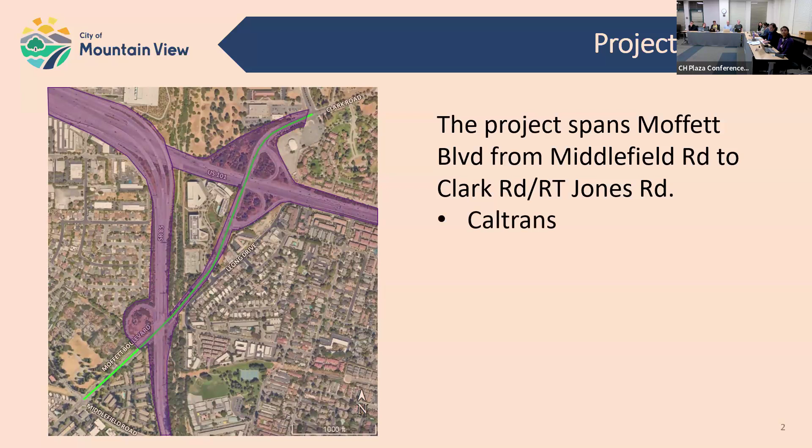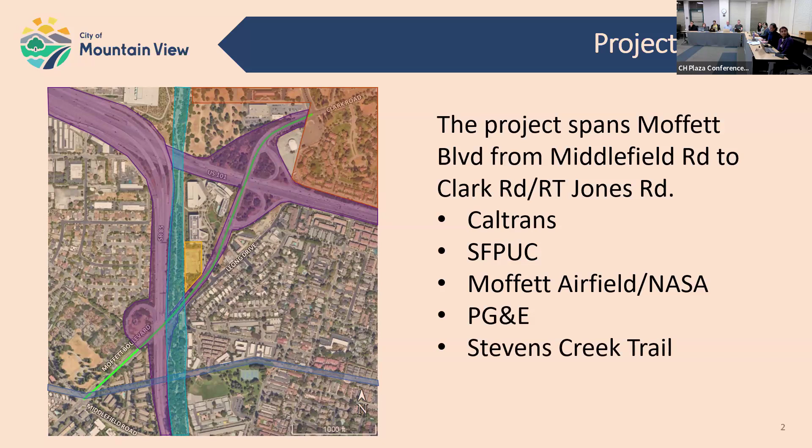Also, a little bit of project background to look at the timeline this project has taken so far.

In 2015, the city contracted with BKF engineers to conduct a bikeway feasibility study for the corridor as part of a planning item. In June 2022, a virtual community meeting was held to gather input on bikeway alternatives, and BPAC was also presented the Complete Streets checklist for the OBAG 3 grant application for review and comments.

At the start of 2023, the city was awarded $3.5 million through the OBAG 3 grant. To secure this grant, council adopted a resolution providing local support, committing matching funds, and stating assurance to complete the project. This past June, City Council authorized a professional services agreement with BKF for design services and to provide construction support, and the design was kicked off this past fall.

This project is federally funded with the One Bay Area grant funds. The scope of the project is dictated by the grant application, and the project design must be approved by Caltrans local assistance to meet the grant scope. The city will start coordinating with Caltrans local assistance in the coming months and is estimating to construct the project in 2026 to meet the grant timeline requirements. Funds need to be obligated by January 2027, which means design and Caltrans approval needs to be obtained by then.

The project scope elements, first and foremost, include pavement rehabilitation on Moffett Boulevard. In conjunction with that, we will be installing Class 4 bike lanes with vertical separation throughout most of the roadway. There will be Class 2 bike lanes at a pinch point, and green conflict striping will be included at driveways, bus stops, and intersections where there are turning movement points. A sidewalk gap closure is proposed on the east side of the roadway between Leong Drive and Stevens Creek Trail, and median modifications will be made to accommodate the bike lanes, buffers, and vertical elements.

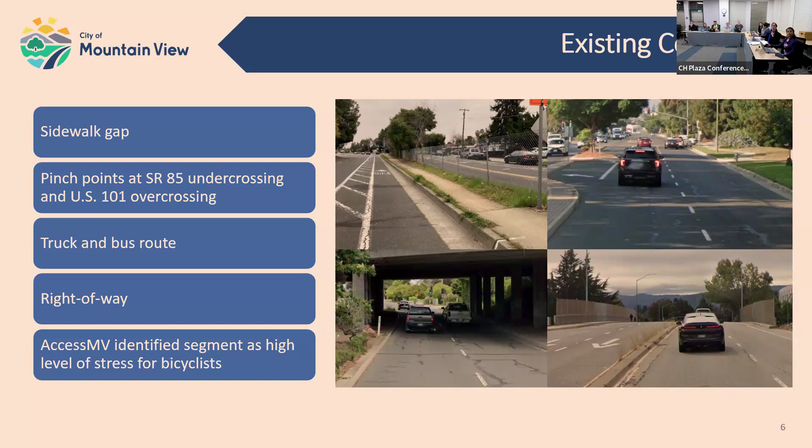In order to accommodate a continuous bikeway along the corridor, removal of approximately 18 parking spaces is proposed on the east side of the roadway adjacent to the Willow Park apartment complex. A parking study was conducted in August 2024 along the entire length of the project, and only one vehicle was observed throughout the study, with adequate off-street parking available.

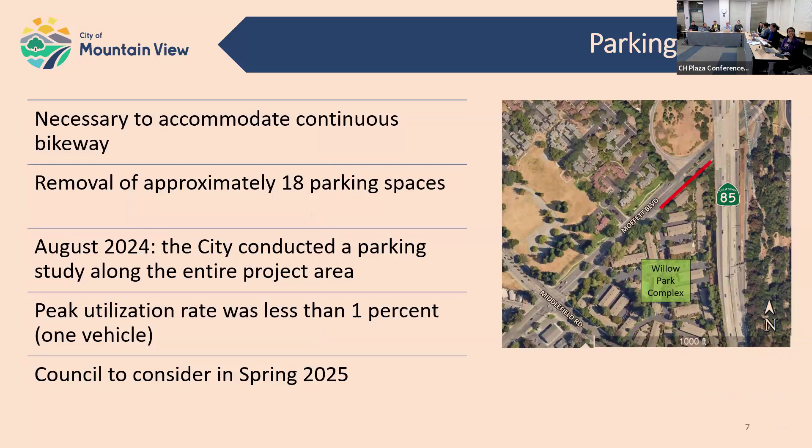We'll be bringing the parking removal item to council for consideration this spring. Staff also evaluated input provided by residents from the June 2022 community meeting and the costs associated with the preferences to identify an appropriate scope for the project design based on available budget and right of way.

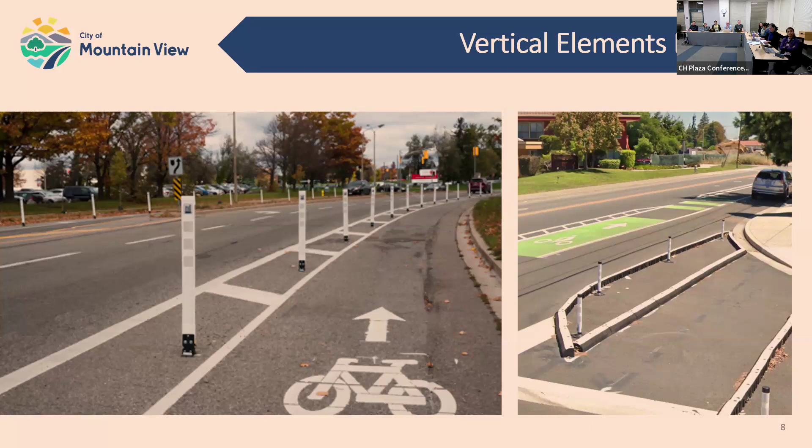Over the next slides, I'll be walking you through segment by segment the proposed improvements and cross sections along the corridor. We'll be starting from the south side at Middlefield Road and moving north to Clark Road city limits. Each slide will have an overview layout, a cross section of existing conditions, and a cross section of proposed improvements.

In segment A, from Middlefield Road to SR 85, there are no existing bike facilities. In order to make room for the bike lanes, buffers, and vertical delineators, center and median modifications are proposed along with lane width reductions. Green conflict striping will be added where driveways and bus stops are conflicting. The intersection of Middlefield Road will be completed in the Middlefield Road Complete Streets project, and the design will be coordinated as that project progresses.

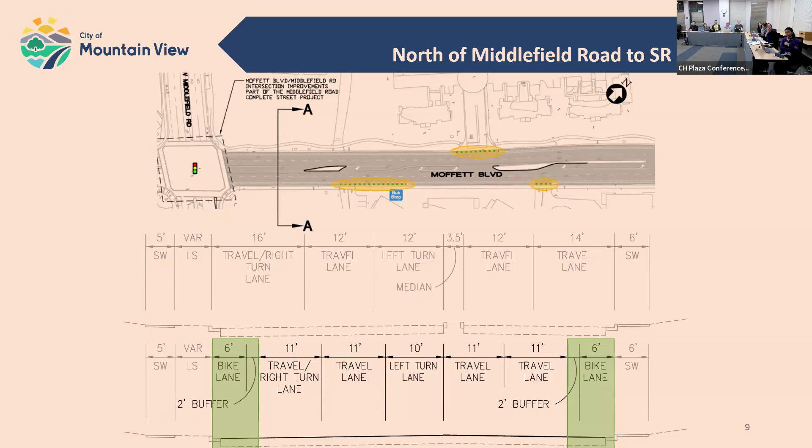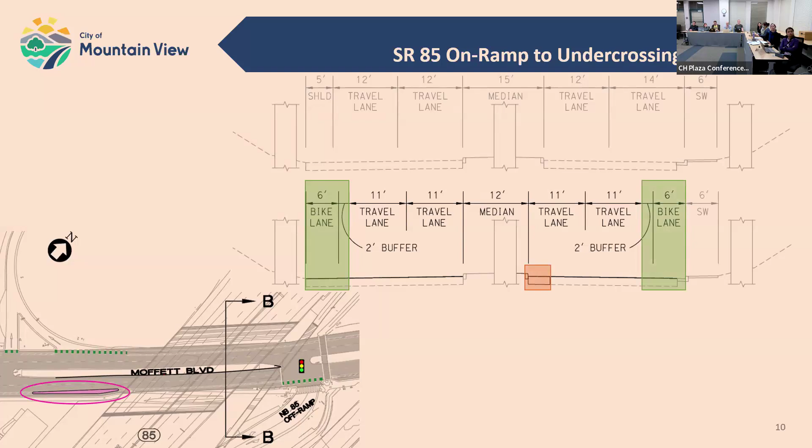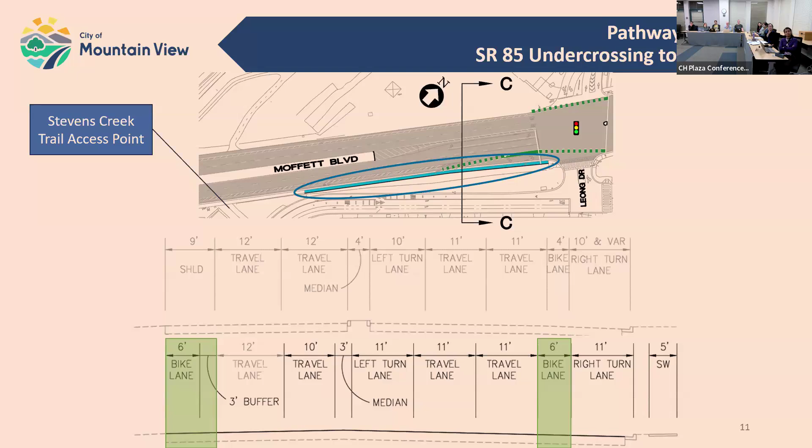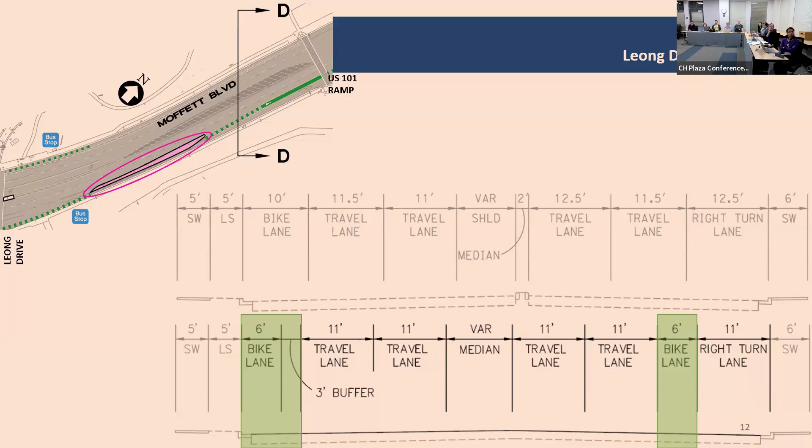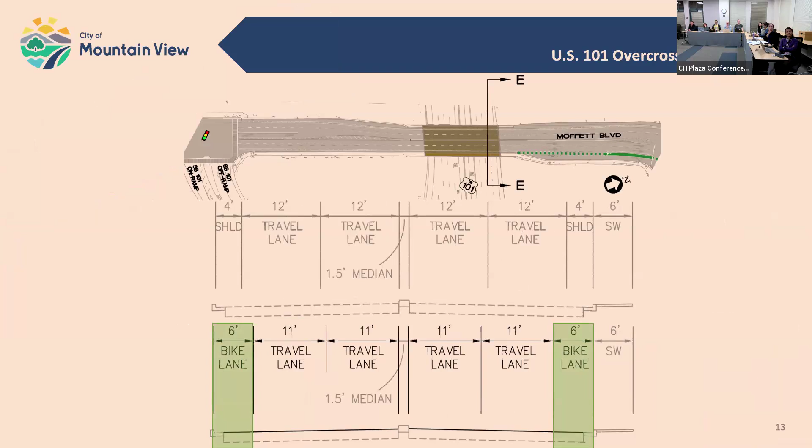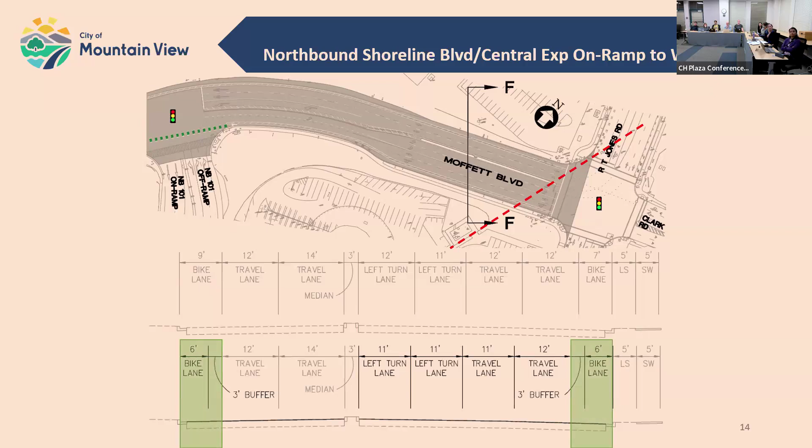So our next steps: we'll be taking BPAC's feedback to CTC next week on Tuesday. BKF will assist with initiating the design coordination with Caltrans. Additional coordination is needed for environmental clearances, grant funding, and so on. We're anticipating design completion by the end of 2025 with construction anticipated in 2026.

This wraps up my presentation. Please let me know if you have any questions.

Okay, we're going to public comment. No, we're clarifying questions, sorry. So, clarifying questions from committee members on the presentation or design.

Mara, go ahead. Yes, so I'd asked a question about traffic counts and road diet and so on, and the response said something like a road diet and other improvements will be considered through the active transportation plan. My understanding was that the active transportation plan is already nearing its final stages. So how would this be considered in the active transportation plan? Or is it that it was already raised and therefore is already part of the active transportation plan?

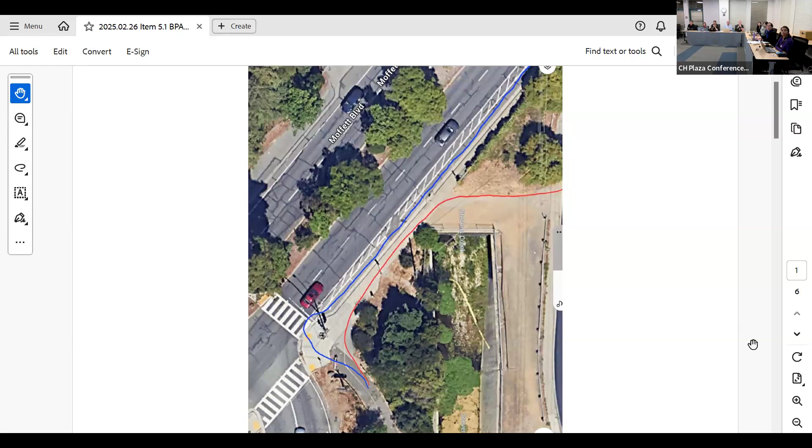I don't know what to suggest, if anything, but it highlights there's a couple paths you can take from the trail to get onto northbound Moffett right now that I have done. I think all of these in the last few years, except for the yellow one, which I last did at least 10 years ago. I wanted to note that the Leong Drive intersection is surprisingly uncomfortable to navigate that way on a bike or on foot, because cars come flying out of the Moffett Boulevard intersection doing left or right turns, and they don't have to stop before they enter Leong Drive. I don't know statistically how unsafe it is, but getting the traffic coming off of Moffett slower would be desirable. I think that would fit in with some of the comments about road diets.

Next, this one. I think it would be desirable to work through how to make some of the left turn movements at intersections easier for cyclists.

Currently if you're coming on southbound Moffett and trying to get onto the trail, you either have to cut across traffic to turn left onto Leong and then get onto the trail - that's what red is - or you can do this sort of two-stage turn by veering onto, I don't know what the name of that road coming out of the Ameswell region is, and then going straight across, which currently is possible. It just isn't really provided for by the layout of the roads.

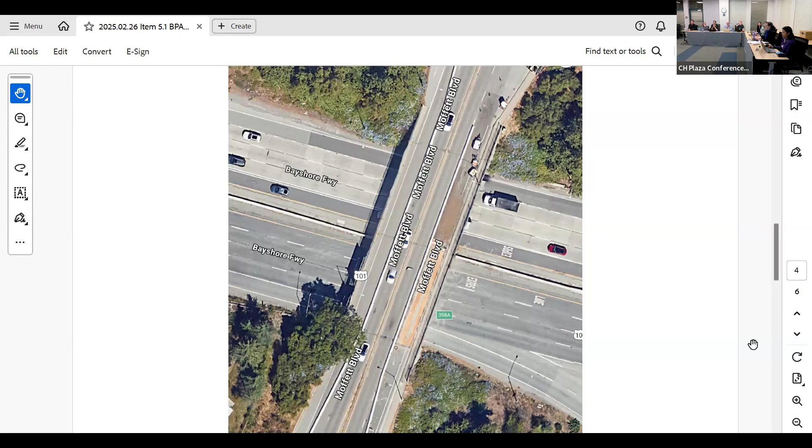Like the fact that I went to Google to grab a picture of what the overpass looked like and realized that the version of Google Maps I was looking at still had those reduced lane markings on it. From having used that overpass on a bike, and I don't know that I ever did it on foot, but certainly on a bike it was much nicer than currently in both directions. And if you were on foot, then you had a nicer, much more protected, much wider sidewalk than you do right now. If we go to the next slide.

Oh, what's that? I don't know what I was trying to make a point here. Next slide.

This is just a note about having the ability to walk on both sides of the roads. I don't know that this is feasible to do in this project, given that trying to have pedestrians on the southbound side of Moffett would require more space than just a bike lane's width. But if we were doing a road diet and had an extra 11 feet from taking away a car lane, then it might be reasonable to basically have the same treatment we did when Caltrans was doing that repaving.

Then a pedestrian can have significantly fewer conflict points, as shown by the circles, if they are trying to walk across - for instance, if someone's trying to go from the Ameswell Hotel to Moffett, to Ames Research Center or the such.

So, yeah, I think that's all I had in terms of visual assistance. And in summary, I do think we should be finding out if a road diet is reasonable.

The other thing that would help is the State Route 85 southbound on-ramp, where currently vehicles turning left from northbound Moffett onto the on-ramp have to cross 2 lanes of high-speed traffic. I have personally executed that maneuver multiple times, and I've been in cars and seen that maneuver a lot, and it's never particularly comfortable.

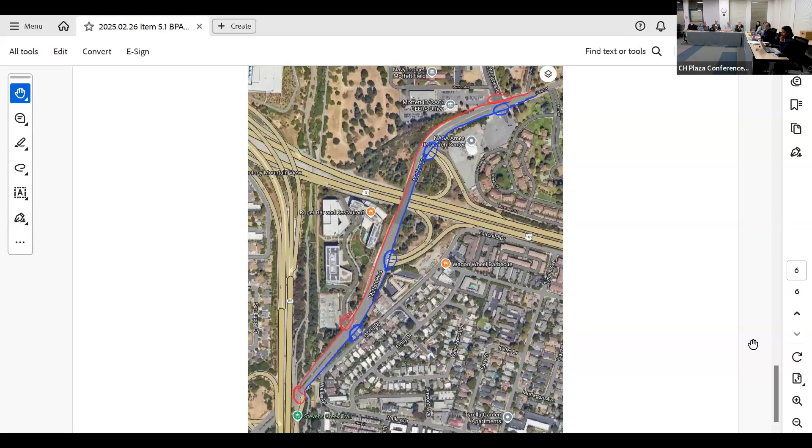I have a minor thing that might just be my problem. Is it possible to bring up any of James's slides that show where... when you're heading, I guess south, towards maybe a different one. Yeah, this one to the left. That's just going north, by the way. There's just one of the routes going south as well, if you want. I think this, yeah, they're all fine, but if you're going south, if south is down.

It forks, and I just feel so dumb because every few years—since I never go on Moffett—I was trying to get to Leong and I end up at the gate at the right part of the fork. So I wonder if that gate could be moved up so that people like me don't end up there and wonder why they can't, on the southbound Stevens Creek Trail. That's sort of where it forks, at first into the bridge and Moffett, and then forks into where you actually get onto Moffett, versus a random access gate that is always closed.

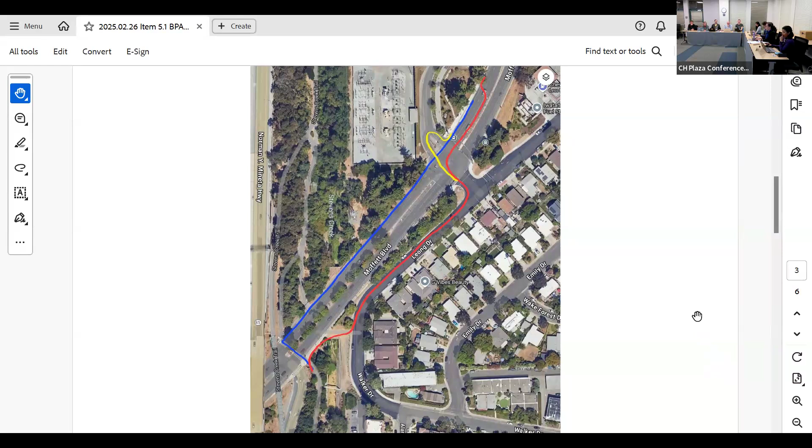Totally minor, but if it's at all possible while the project is being done, maybe consider moving that gate so it's less confusing for people like me. Overall, I'm so glad staff took the initiative to get funding for this and to design it and everything. So I do like the opportunity—there was some money, we grabbed it, and we try to make things better.

I have a long wish list of things I would like to do, but given the constraints and given the uncertainties also in DC, where we see funding being stripped by some tech bro, I think we shouldn't rock the boat and should try to keep it on the radar as much as we can. So I'd like to propose some additions though on the existing crosswalks.

If you look at the NACTO guidelines for crosswalks, high visibility, having ladders or zebras, are definitely the norm. But it's not the only thing recommended. It's also making sure there is proper lighting on the crosswalk, not just for the cars or on the sidewalk only. It's also making sure, obviously, that the ADA ramps are correct—I don't know the status there, but it's something that should be addressed during this project, because it's a liability for the city.

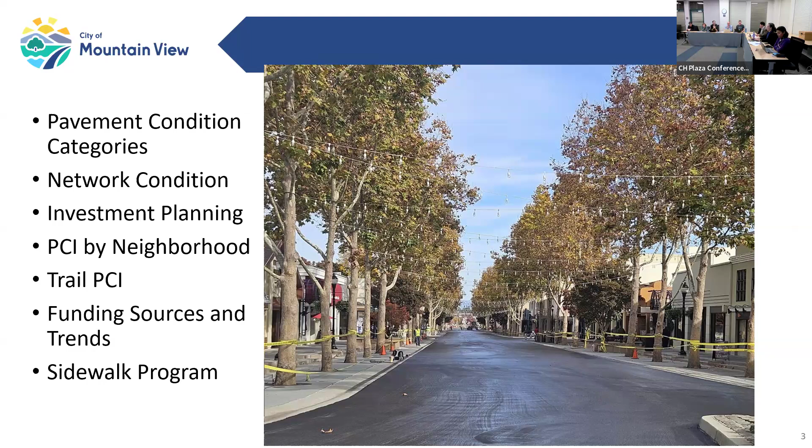how pavement segments are selected for treatment, funding sources, as well as related elements including public safety enhancements. So this table here shows the different pavement conditions. This is kind of established by MTC. Most of the cities in the Bay Area use these same categories. The PCI rating is a 100-point scale, 100 being newly paved pavement, and failing pavement is essentially anything in that

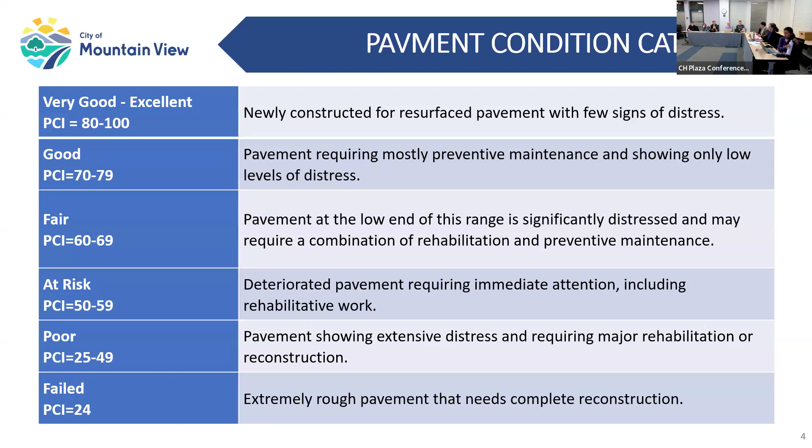kind of 50 or below category. Here it says PCI is 24. That's rather subjective. Once you get below 50, it's really difficult to differentiate terrible versus more terrible. But that's where we are.

So the report helps us shed light on how different segments are deteriorating, which ones are holding up, and which ones are good candidates for treatment.

Following that is a steep decline in quality around years 5 to 7. And then fairly predictably, it goes down from good to fair to poor in a matter of several years.

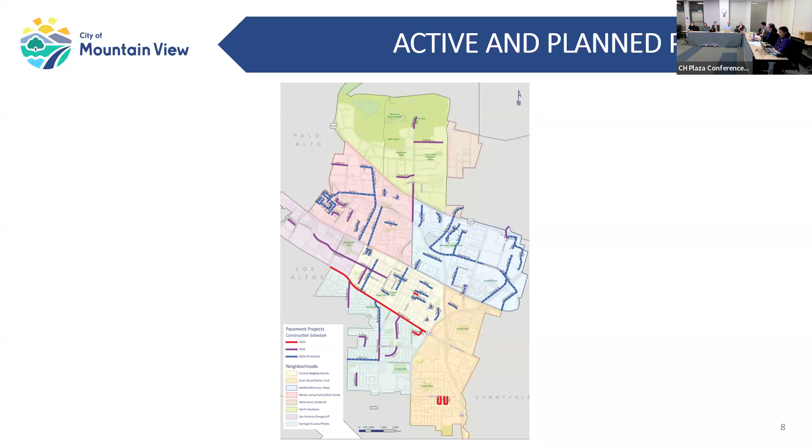New this year, we asked our consultant to evaluate our pavement trail condition. The city owns and operates a 15.5 mile network of trails, and our path network PCI is 65, or in fair condition.

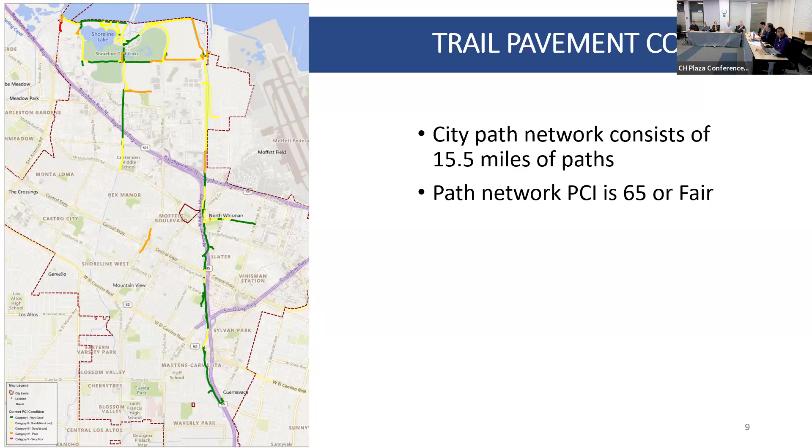What are the colors? I think the ones owned by the city are in green. There's a lot of colors there. Okay, why don't I get you a legend on those colors? It's on the bottom left there, but I can't really read it. The green says very good. Oh, it is—oh, it's good condition. There's two different yellows and they're very close in color. How about we get you a better map? This was the one the consultant delivered to us, so we can ask for that. Orange is poor, yes, so the colors are the condition, green being good. Beyond that, we'll find a better way to illustrate them. What is the purple, I guess? I don't know—pardon? What is purple? Purple, oh, that's the highways, freeways. Oh, okay, yes. I don't know why they were highlighted, that's all. Right there, please.

Let me give you a recap of our current funding situation. Pavement projects are funded by a variety of local, regional, and state funding, sometimes federal funding. The state gas tax and SB1, along with VTA vehicle license fees and Measure B programs, all provide funding to the city for pavement maintenance. However, the revenues from these funding sources are not keeping up with the rising cost of paving projects, so we are slipping further down that curve. The gas tax revenue has been declining in actual value over the last several years and will continue to do so as we expect more gas-powered vehicles to be replaced by electrics and hybrids. In addition, some of these funding sources are intended for other types of transportation improvements, so the net available funding for pavement maintenance has been further declining. We just have a lot of competing interests over those sources.

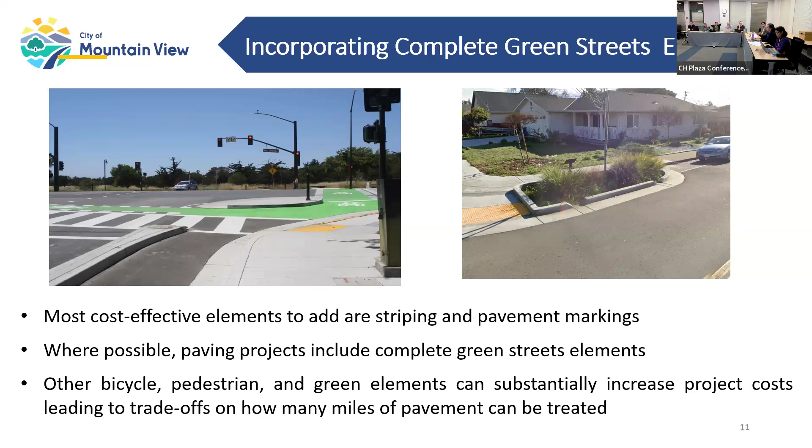Measure B and SB1 both have a threshold. As a goal, they'd like to see the network PCI at 70 or above. That gives us additional latitude for Measure B funding — it allows us to spend that on elements not directly related to pavement. We can put it into striping, road diets, or other transportation improvements, if we maintain a minimum PCI of 70. So we're chasing that at this point.

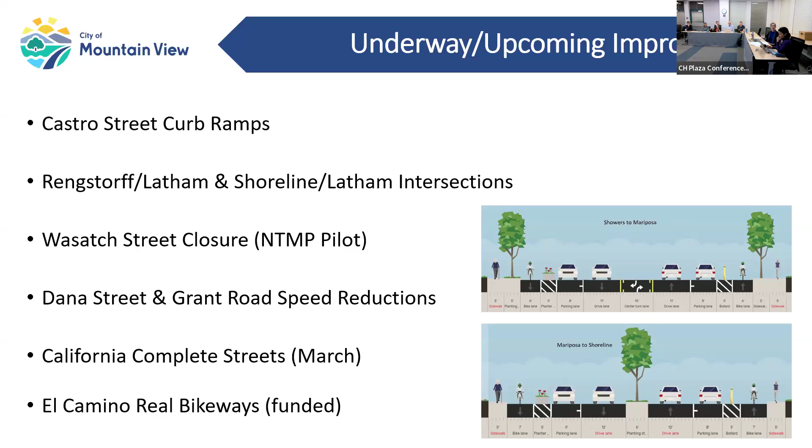In terms of upcoming events, we have a community workshop next Monday for the Moffett Boulevard Precise Plan, a CTC meeting on the 4th of March where we'll be taking the TDM framework, and a community workshop on the 5th of March for the active transportation plan. So lots going on next week.

And then we have a special BPAC meeting on the 11th. And we're expecting to have an event to celebrate our new electric buses after they arrive, which is TBD.

Finally, we have a bit of an update from a few months back, so just catching up on Ask MVs. The theme seems to be blockages to bike lanes and sidewalks, some of which were construction related. Also a steady inflow of information on near miss data, sorry I don't have more details on what those were. Brandon provided this information for us, so I'll have to follow up on the details. And that concludes my report, thank you.

Questions, committee members? Stone? I'm curious, I didn't know we were getting new electric buses. What's wrong with the old electric buses? We don't have electric buses at the moment.